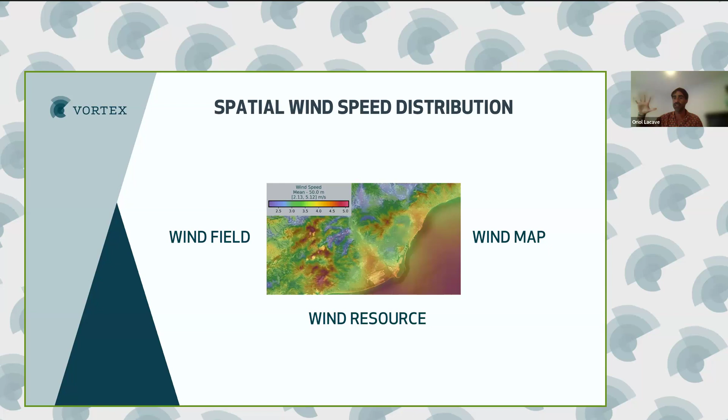The spatial wind speed distribution can be called different ways: the wind resource of an area, the wind map, the wind field. What we know is that the wind will change across the area, and every site will be different, and the way the wind changes will be different. So we can define it as the variation of wind speeds across different locations within a specific area.

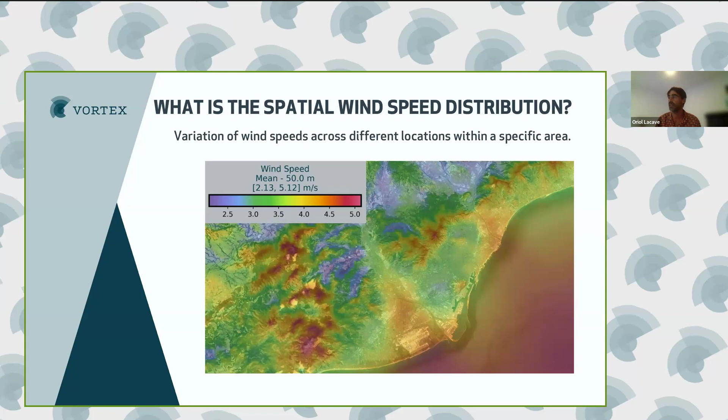So how can we compute a spatial wind speed distribution or a wind map? There are different methods. The first is by making a horizontal extrapolation given a time series inside the area we are interested in. We just have the roughness, the topography, and a time series in that area, and we make a horizontal extrapolation to set this information into all the area we are interested in.

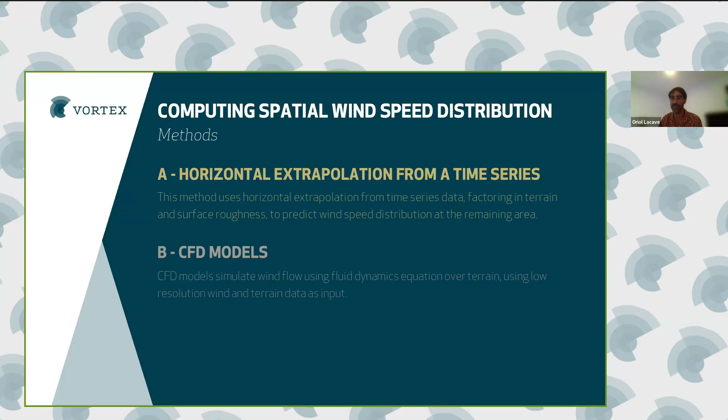Another method is CFD models, which account for fluid dynamics. They consider the wind as a fluid, and by the typical computational fluid dynamics equations, they try to set up how that fluid, in this case the wind, will move around the area, influenced by the topography and roughness.

The other way of computing, in this list, is by using meteorological models. In our case we use the WRF model, and what they do is a process we call downscaling, because we start with low resolution data and we run WRF to get much higher resolution and detailed information on the atmosphere.

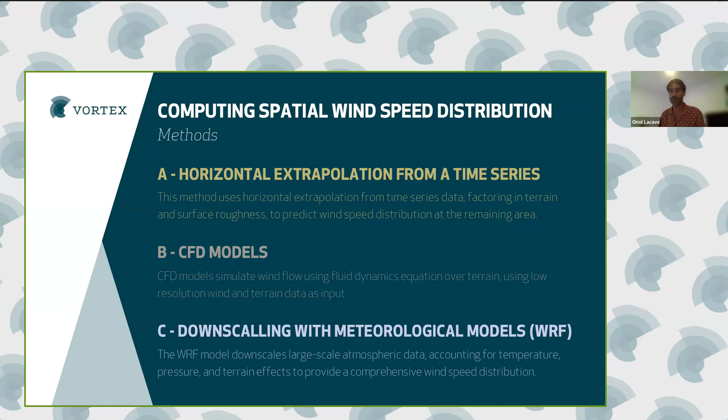So just to show some differences you may have when using different data which comes from different models, I want to show a special case where you can easily see how different models have different behaviors.

For example, one phenomenon you may all know: on a hot day you detect the sea breeze. It's very hot, you go to the beach, you lay down, and you feel a colder wind coming from the sea. This wind comes from the sea, which is colder, to the warmer area inland. This makes the hot air move vertically and creates a circulation that we call the sea breeze. This is a kind of wind totally driven by changes in temperature. If we do not consider temperature in our wind computation, this effect will not be considered.

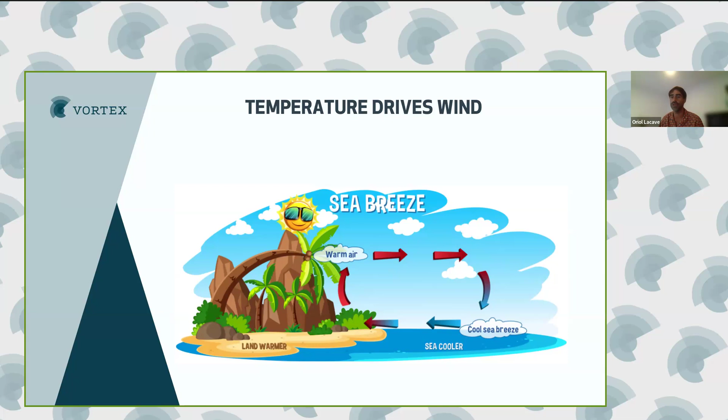Let me show you a sea breeze influence in a case study. This is the domain of the simulation, where we run our simulations. We have a sea on the northeast and land in the rest of the area, but on the southwest there is much more complex topography.

We ran two models. The first one is WAsP, which fits into the group that takes a time series and then tries to extrapolate that information into the rest of the area. In this case, we introduced a time series in the center of the domain, and the model extrapolated the information, giving a pretty soft wind flow, with some variations on shadows over the highest or more complex terrain areas.

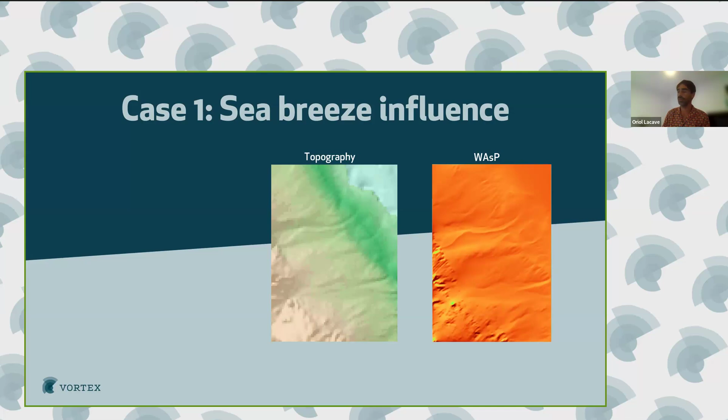Then we repeated the process, but this time the model was run on our typical Vortex WRF, and this is what we got. This is the same area, same place, same height at 100 meters, same scale. What we see here is that the windiest part is near the ocean, near the sea, and it's very different in the area farther from the sea. So we can see that in this case the model has at least captured some sea-land wind, and it shows us that both models produce very different patterns.

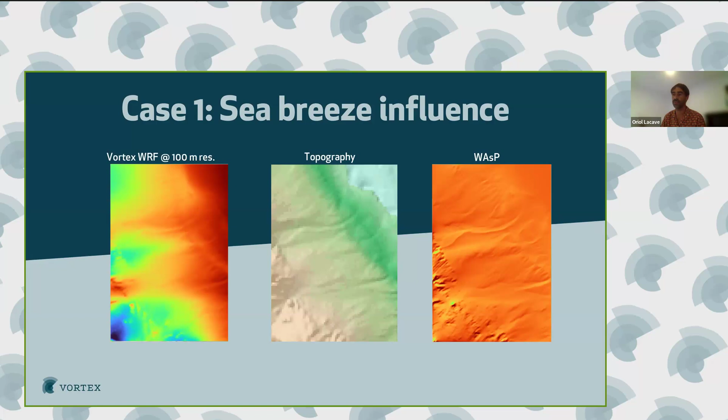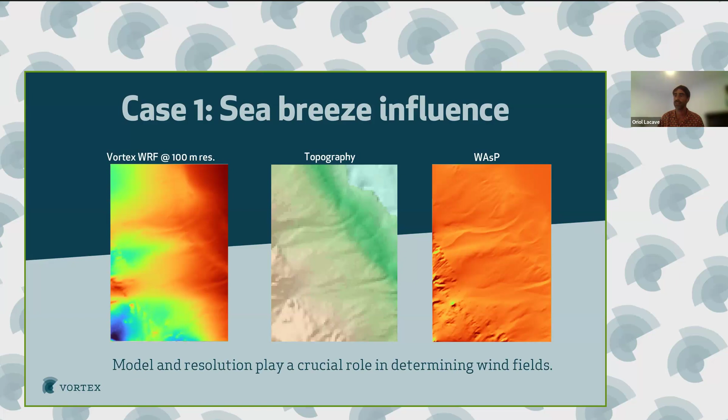In this case, the model plays a crucial role, okay, but also the resolution. Having higher resolution lets you capture even better this kind of very particular effects.

Let me present another case. In this case, it's not a sea breeze, but a case where in many projects, in complex topography sites, you would expect that on higher places of the terrain there would be high wind speed, and on lower places there would be at least more or less few wind. So I will present a place where this is not true, and it's been checked with measurements.

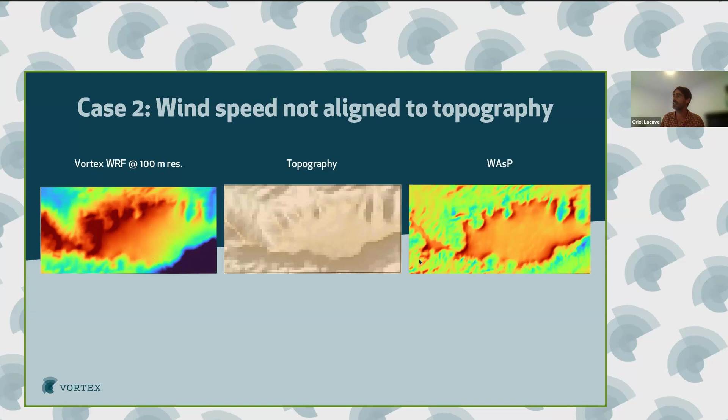So we can see very different patterns. It tells us that the maximum wind speeds do not correspond with the maximum elevation. So something's going on here.

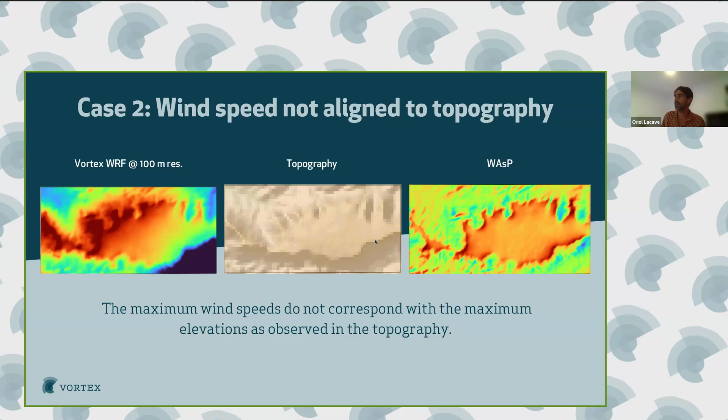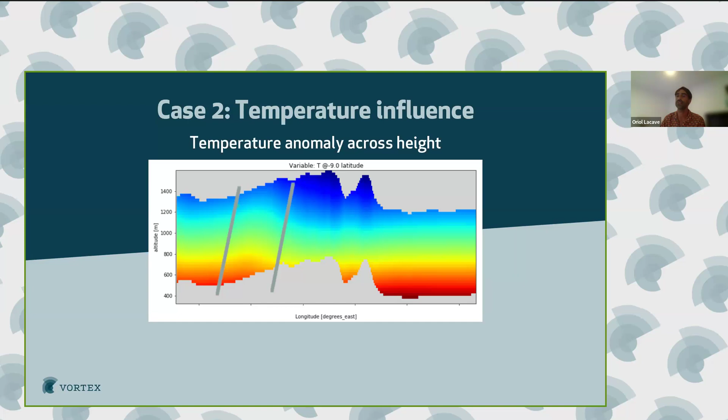This is mostly produced by the foehn effect. The key thing here is that the model is capturing this temperature alteration. As we saw before, if the temperature is modified, it can produce alterations also in wind, which is what we are particularly interested in.

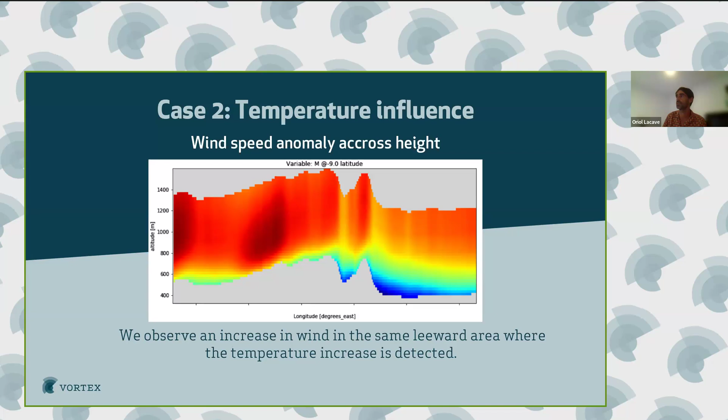So now that we have discrepancies between models, we can set up our own strategy with basically two objectives. The first is to check if this phenomena is occurring or is a hallucination of some of the models, and the other is to quantify it, in case some of the models is correct, then quantify this variation.

So for this we would need at least two met masts. We would locate one met mast, for example, on the top of the hill on the east, and then the other on the west on another expected highest wind speed for one model. The objective for this is to select one model, and then quantify the accuracy and be able to calibrate the model correctly later on.

So we've seen everything here, all the wind spatial distributions in a qualitative way, but we need to quantify it in order to compare models with a methodology, and also to validate models against some measurements in case we have them.

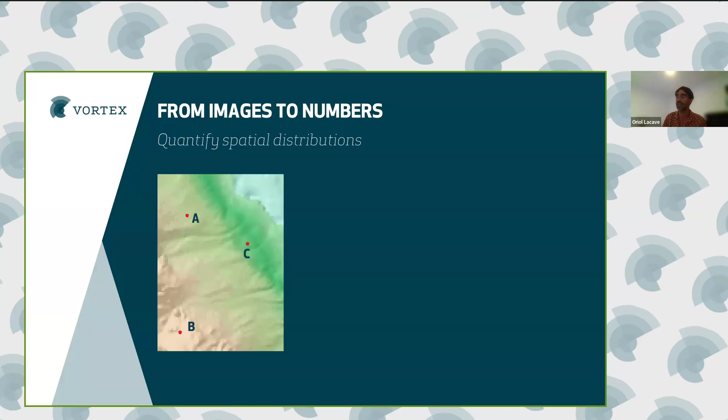So we would need at least two met masts. I set up an example of three met masts. Imagine in the case of a breeze case, we have three met masts, A, B, and C. So we compute what we call speedups - speedup is just a factor. So we would compute the mean wind speed at point A versus the same at point B, and we would repeat for points A and C.

And then we would repeat this for a model, repeat for another, and in case we have a met mast, we would compute that for the met mast location. This way we would end up with a value for each pair we have, and we could compare the models one against another with a number. We could set up in our methodology and compare those numbers.

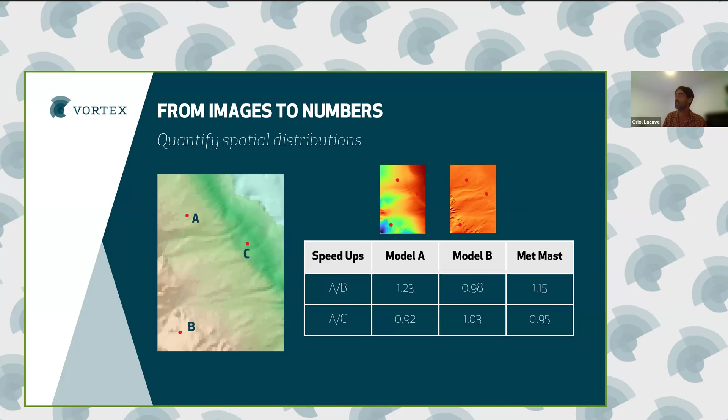And then if we have the met mast, we could validate. So here we are not validating wind speeds, we are validating spatial distributions. This is the objective of using speedups.

Imagine now you want to fix your map. You say in one place, you know your bias, you have a measurement, you have your model. You can increase or decrease that whole area, and you would fit the map to match exactly your measurements. But in that case, you would not correct the wind spatial distribution. This is another example where you can see the difference between when your objective is to determine the wind speed at a single location, versus when you want to measure how accurate a spatial distribution is.

So let me present now the calibration with measurements that we perform at Vortex.

Andre commented out more or less that we can do that for farms. We can do that for blocks too. Farm and blocks use the same technology.

We run the simulations for an area at 100-meter resolution. But for blocks, we save the simulation after it's finished with fixed heights - not all the atmosphere, but heights up to 300 meters, and for all the area, and then you can perform as many calibrations as you need and extract time series. And for farm, we don't save the simulations, but we save the WRG files and GIS files to extract the temperature and all the variables.

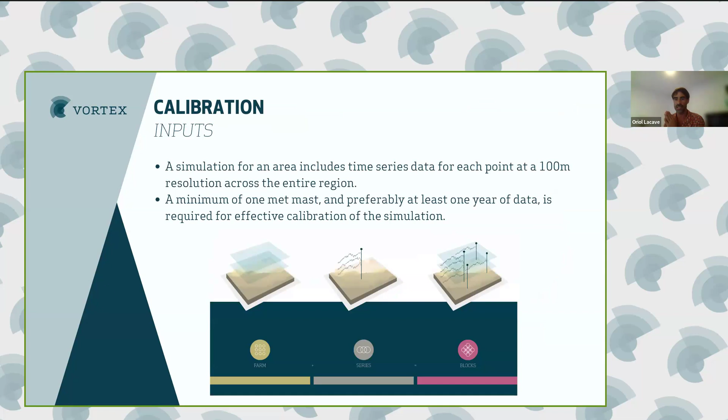We need the simulation. We need at least one met mast with one year of data, and with those inputs, the first step is we calibrate the time series of the simulation using your met mast.

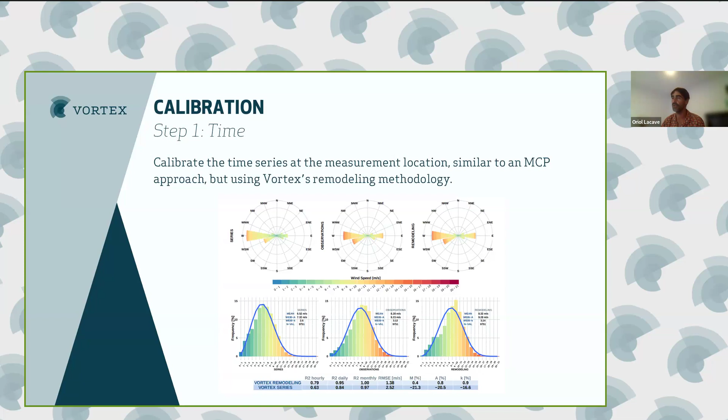So we end up with a calibrated time series, which has the wind direction, histogram, so A and K and other parameters corrected, not only the bias, but all the time series, because we calibrate each timestamp. Okay, and then we try to expand that information from the met mast location or multiple met mast locations to the rest of the area.

So we try to adjust based on the similarity of the met mast location to the rest of the areas. So we try to figure out based on topography or correlation from the met mast to the rest of the points how similar they are, and this helps us to introduce how the information we have from the met mast is reliable or not to each point in the area.

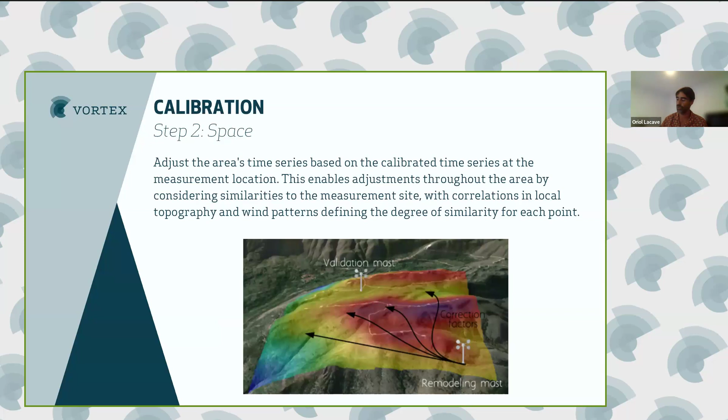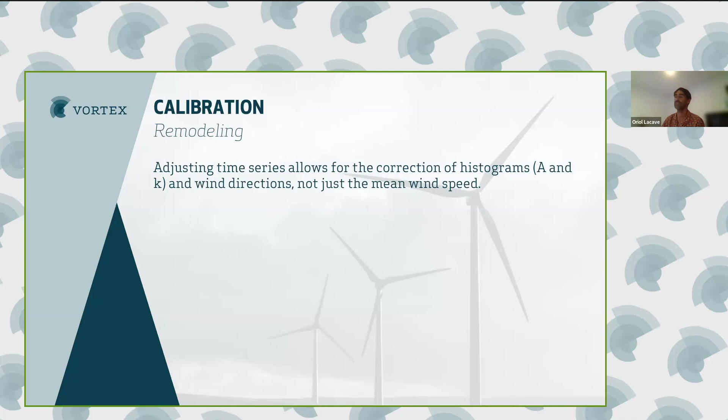Okay. So by adjusting time series first, we can correct histograms, wind directions, and not only the mean wind speed. And with the inclusion of the similarity, we correct the speed-ups, and we mostly prevent the creation of bubbles in data. So we do not want to destroy the spatial wind distribution.

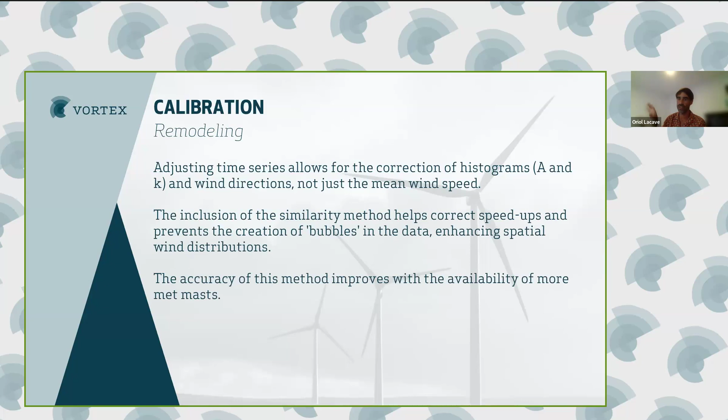The accuracy of this method improves with the availability of more met masts, as we consider that having more met masts, we have different wind patterns, so we can use different kinds of information to correct different areas in the map. Okay, and this is more or less about the calibration.

And just to end up, let me make a summary. The first point was that the wind speed spatial distribution and bias have different accuracies. They are different targets. Second is that different models can produce different results, in terms of bias, but also in terms of spatial distribution. And the third is that the model spatial fields, the wind maps, can be improved.

And if you make a good design of your met mast campaigns, that helps you later also improve your wind maps more. And that can be performed if you are using a correct calibration method. And that's all. I hope it was at least a little bit interesting.

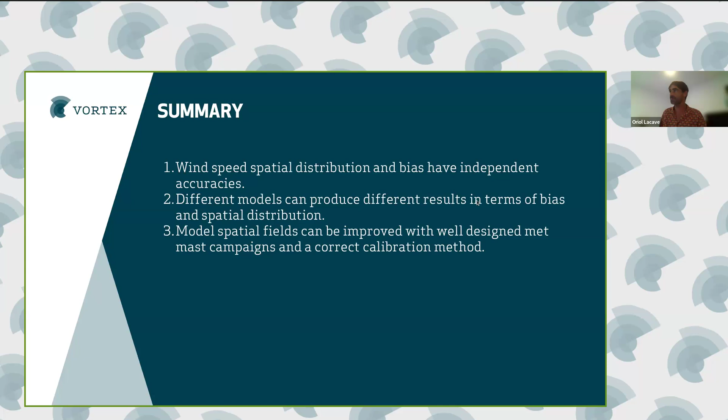And maybe now we have Patricia, Andre, some questions and answers. We still have 5 minutes left. Andre, maybe you can read this question in Portuguese. Well, I understand, but yeah, Oriol, this question you can answer.

Just to make a quick comment about what Oriol said. It is important to understand that the thermal effects and some of the effects that do not have to be influenced by the topography, like when you are dealing with ocean effects and sea effects, are not characterized by the linear models.

So it's pretty common in Brazil, when you have done the measuring campaign, to do the horizontal extrapolation with the measurements and to think that it is accurate, because since you have measurements, extrapolating an area based on them will have a low uncertainty. But the thing is that when you're extrapolating that, you could be not characterizing those thermal effects.

So that's when it's important to use modelization that takes into account all the variables of the atmosphere, like Oriol was explaining. So a really good combination will be the measurements and a good modelization brought together to reduce the uncertainty.